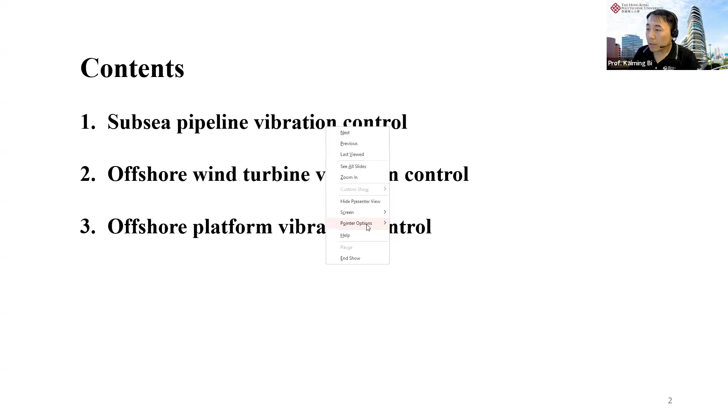Then I will go ahead. Today I would like to introduce something on offshore structure vibration control. That's basically what I did in the last couple of years, mainly in Australia. As introduced by the Chairman, I joined Hong Kong PolyU about 2.5 years ago, in early January of 2023. My presentation includes 3 parts.

The first part is on subsea pipeline vibration control, the second part is about wind turbine vibration control, and the last one is on offshore platform vibration control. I will go through them quickly one by one.

First, let's have a look at subsea pipeline vibration control. Here I just introduce some concepts and results because of time constraints, so I will not explain too much. If you are interested, you can refer to my previous papers, which you can download by searching my Google Scholar or my personal website for more detailed information. I will not give too much detail here.

So let's have a look at this pipeline. I propose a concept called pipe-in pipe, using this kind of design to control pipeline vibration. So what is pipe-in pipe? What is the PIP system here?

Based on the name, you can see that it actually includes two pipes here. We have an inner pipe and also an outer pipe. For the inner pipe, of course, it's used to transport the oil and gas. This pipe is not new, okay. It's already being applied. We just revise the current design to achieve our aim.

This setup has already been applied in the offshore industry, especially in the deep sea. The inner pipe, as mentioned, is used to transport the oil and gas, and the outer pipe exists because, being in the deep sea, the pressure from the seawater is very high. So if you have an outer pipe, it can provide protection to the inner pipe.

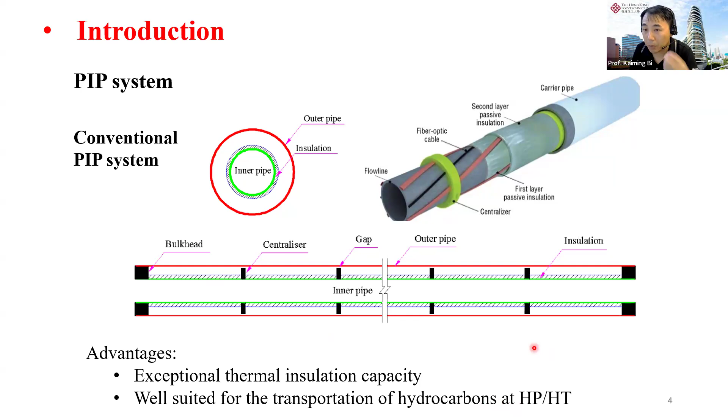These two layers of pipe are connected by this bulkhead and also by this centralizer. But if you look at the current design, this centralizer is not connected to the outer pipe, so the inner pipe and outer pipe are now just connected by the bulkhead. Because of this kind of design, this pipeline has exceptional thermal insulation capacity, so it's well suited for transportation of hydrocarbons at high pressure and high temperature environments.

We did have some previous studies on this part, mainly focused on buckling, because the sea ground may not be flat - you get some kind of curve there. In this case, it may cause a buckling problem, specifically upheaval buckling. Also, if you have some imperfection at the pipe, it will introduce local buckling, and this local buckling can propagate as well - that's buckling propagation.

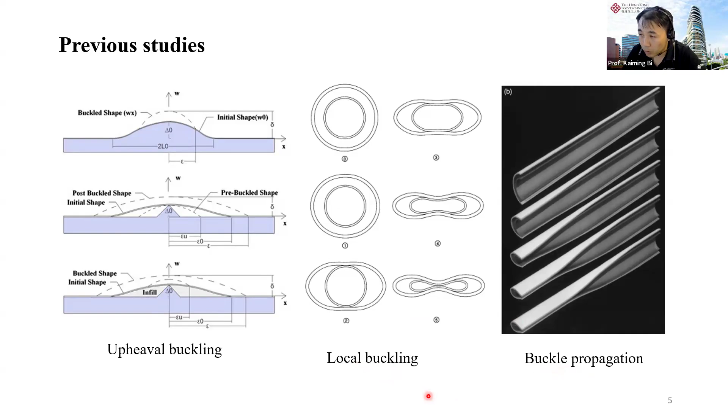That's from some previous study, and also because this pipe is located in the offshore environment, in the subsea, this pipe might be suspended - not fully buried in the soil. Because of this suspension span, it may introduce vibration induced by, for example, earthquakes, and also by vortex induced vibration. Everyone is quite familiar with earthquakes.

For this vortex induced vibration, let me explain a little. Now we have a flow passing through a bluff body - we see this round cross section here. This may introduce transverse fluctuation of this pipe, in the transverse direction, due to the periodic shedding of the vortex. This may always exist and may threaten the fatigue life of this pipeline, so it's important to control this vibration.

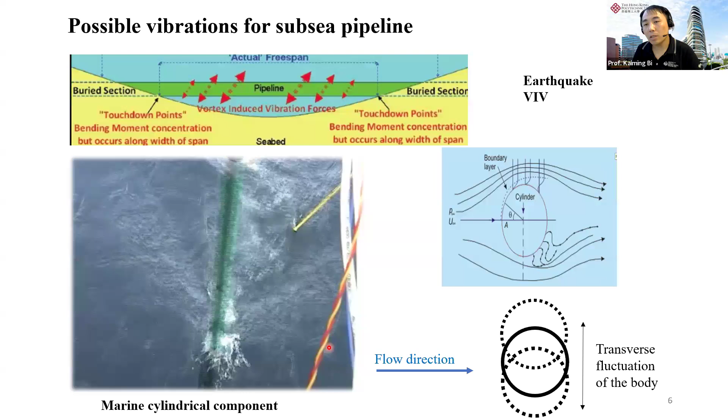Then we introduce this concept I just mentioned. Based on the current pipe-in-pipe system, we revised this a little bit, and we form a so-called system similar to a tuned mass damper system. That's a very widely used system in structural vibration control areas. Let me introduce this a bit.

Now, for example, we have a structure - I simplified it as a single degree of freedom structure here. This red one is connected by a spring and also a dashpot. Now, if I want to control the vibration of this primary structure or main system, we can link a very small mass to this primary structure. The mass ratio between MT and MS is normally, in civil engineering, less than 5%. We link a small mass here, but because our civil engineering structure is very heavy, even 5% is actually pretty heavy - there's a lot of mass there.

So then we can properly select this connecting device - we see there's a spring and also a dashpot there. We can make this green structure, the TMD system, vibrate out of phase with this primary system or main system. For example, if the primary system wants to vibrate to the left, this TMD system may provide a force to the right.

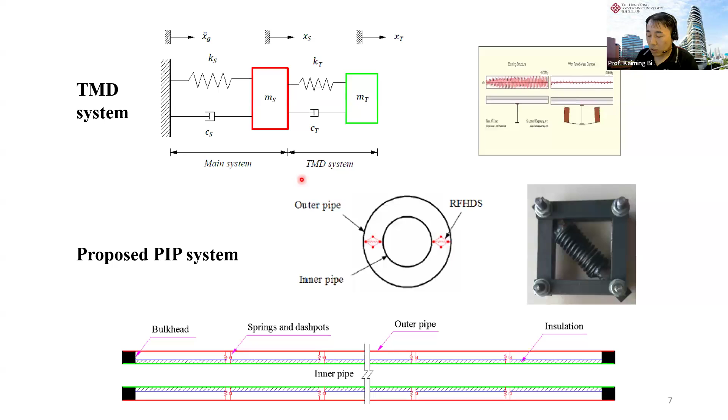Based on this concept, now we can revise this PIP system a little bit. So instead of using the centralizers I mentioned in the traditional design, we can use some connections to connect this inner pipe and also the external pipe, the outer pipe, together. In this case, it can form this TMD system to cancel the vibration of each other.

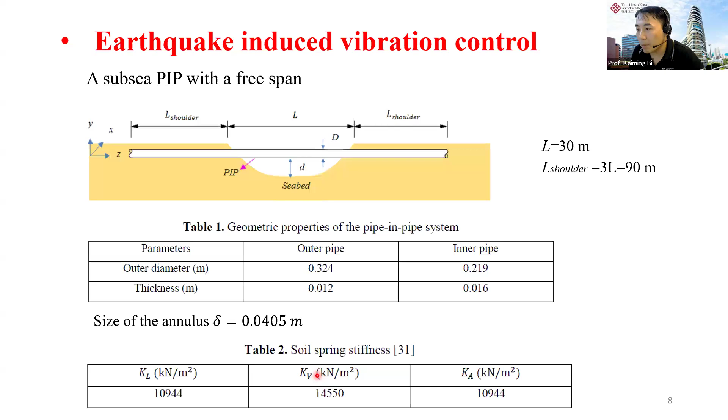Here I just show you some of the results. First, we have a look at this system when it's subjected to earthquake excitation. I will not give the details here. So we got a suspension span here, and I give you the different parameters of this inner pipe and also the outer pipe, and also the soil spring stiffness as well.

I just mentioned we should properly select these parameters, so basically we need optimization here. For this formula, I will also not talk about it, but we can base this on many very mature techniques and formulas to predict these connecting parameters.

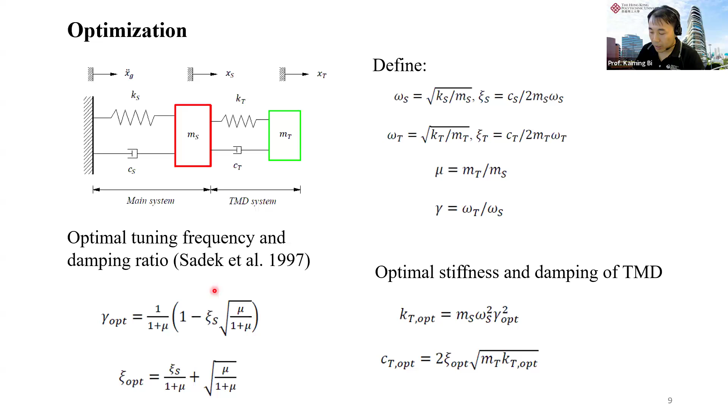So now for this pipe, I just choose three typical earthquake ground motions with different frequency contents, and we have a look at these results here.

For a normal TMD system, we actually didn't pay too much attention to the vibration of that small mass, because normally we need it to vibrate very severely - we need a large vibration there to more effectively dissipate energy. We didn't pay too much attention to that, we allow the vibration of the TMD system.

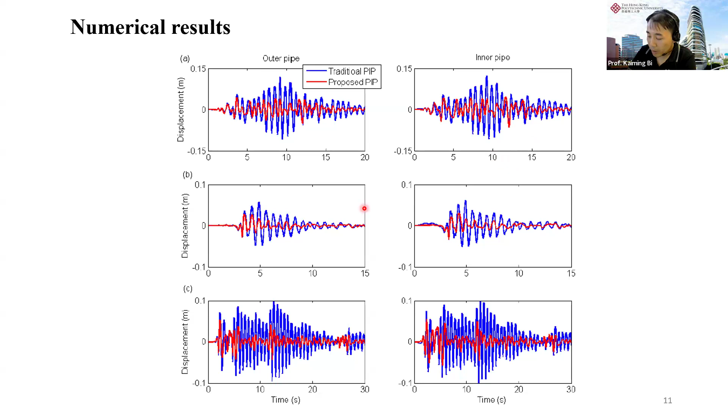It's a ratio, so that means the vibration in this case, because of the large mass ratio, can significantly reduce the inner pipe vibration as well. So that's actually the benefit, and it also improves the robustness of that system. So that's just one example, when it's subjected to earthquake loading.

So now I'll give you something on vortex-induced vibration. I think I need to go a bit faster because I've got quite a lot of slides here - maybe I cannot finish all of them. And it's already 5:30 now.

For this vortex-induced vibration, we don't have this kind of test before. All previous studies used a rigid pipe, so it's only one layer of pipe. So then how do we validate our analytical model?

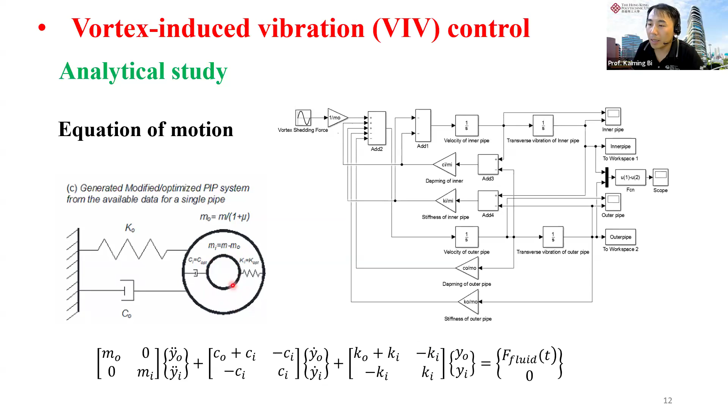Now we use something to connect them together. If I assume this stiffness is very large, then we can consider these two pipes vibrate together, rigidly linked. If we derive the equation of motion of this PIP system and assume the stiffness is large enough, this system can be simplified as our traditional one-layer pipe system, and then we can have a look at our result here.

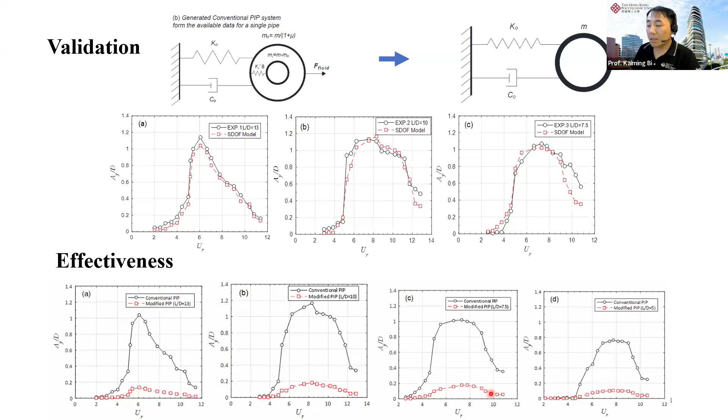We can see when you modify this, the vibration amplitude is much smaller compared to the traditional one. And we further did the CFD simulation there.

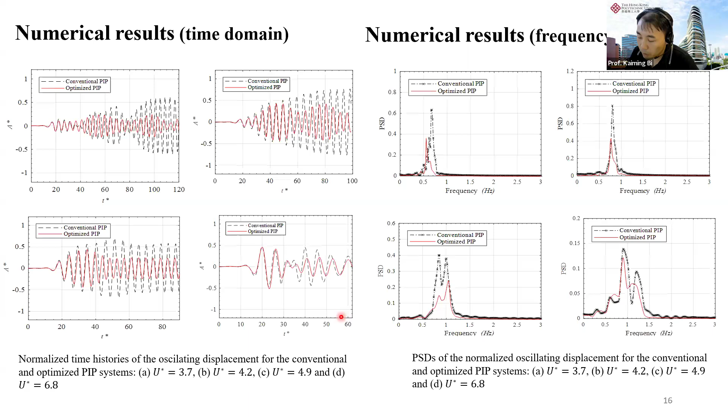So that's for the validation, I won't talk too much on this. That's in the time domain and also in the frequency domain results under different reduced velocities, basically the velocity of the flow. We can see in both the frequency domain and the time domain, the response is reduced, further demonstrating the effectiveness of our concept.

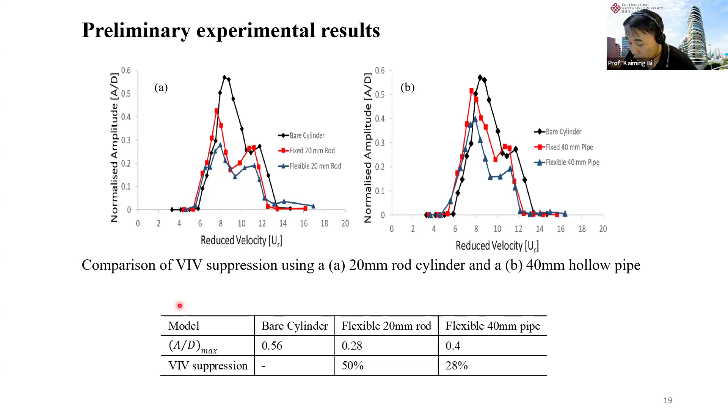And if we use a flexible rod with some optimization there, we get the least response. So that demonstrates the effectiveness again. So that's the one concept, we use the PIP system to control that.

For this vortex-induced vibration, we know that if we change the shape of the pipe, it can also change the formation of the vortex there. It can reduce the vortex-induced vibration. So based on this, instead of a round pipe, we make the outside like a textured pipe.

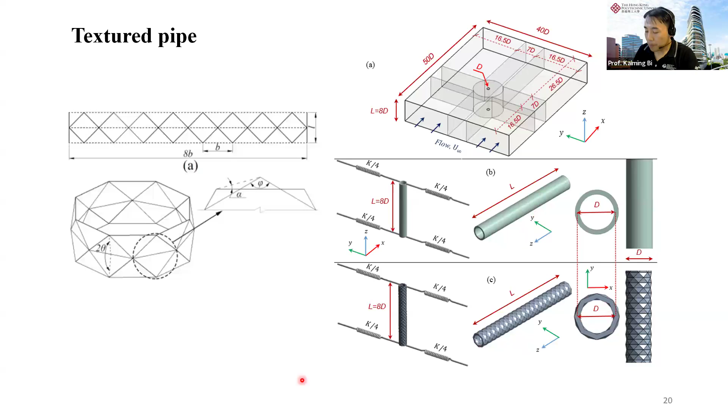Then we did some numerical simulation. If this is our smooth pipe, and our design becomes the texture pipe, we can see that this amplitude becomes smaller. So that means it's effective.

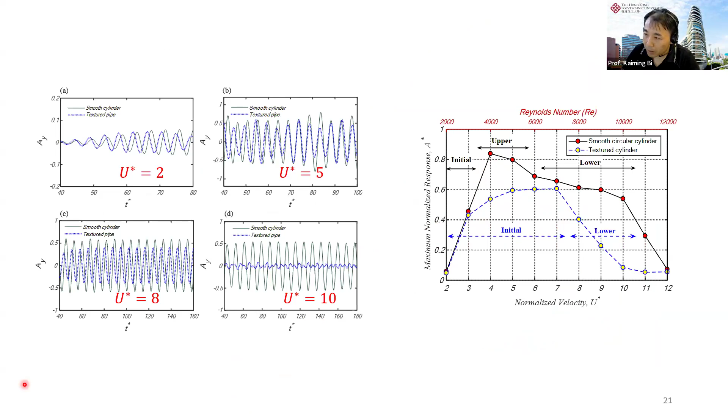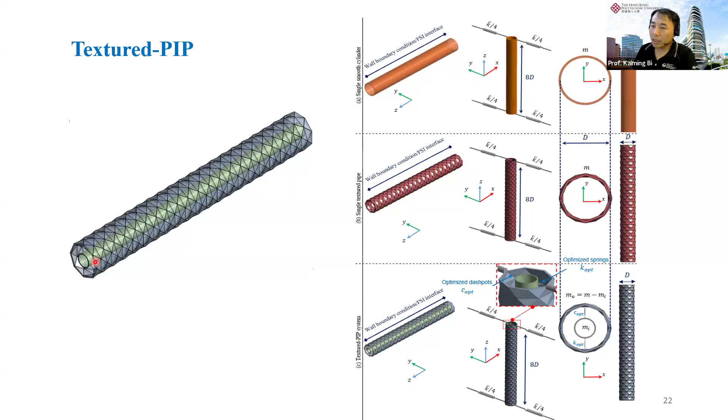We can further combine these two concepts together. Now the external pipe is the texture pipe, and we also have an inner pipe. Then it becomes the textured pipe-in-pipe system.

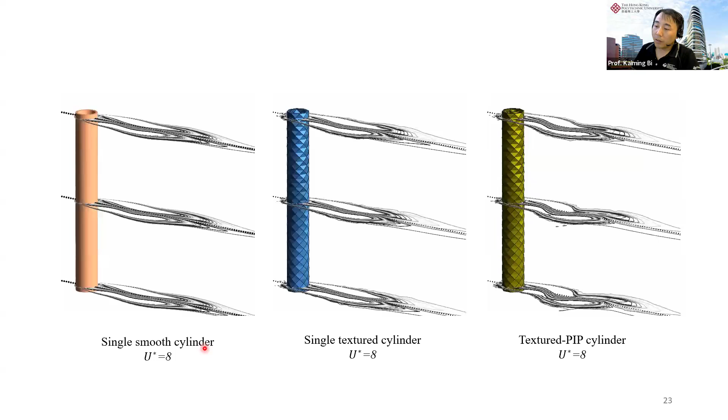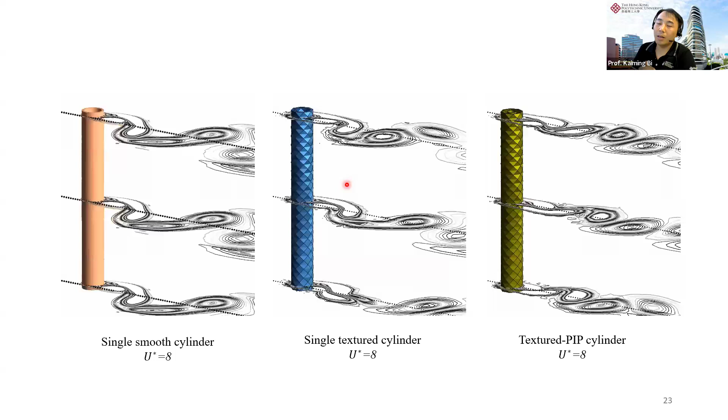If we look at these results, this is a single cylinder, a smooth cylinder. If it becomes a texture cylinder, the vibration becomes smaller. And if we further use this PIP system, the vibration is the smallest. Sorry, maybe you cannot see this very clearly because the simulation size is pretty large, so the slide of my PPT is more than 300 megabytes, so maybe not that smooth.

I'll just show you these results in the time domain, I think that's more clear. You can clearly see at different velocities, maybe this one is even the clearest here.

So if it's a smooth single pipe, you get this kind of result. If we change it to this texture pipe, this result is reduced. If we change it to this textured PIP system, this result is even smaller, because we use two kinds of mechanism there.

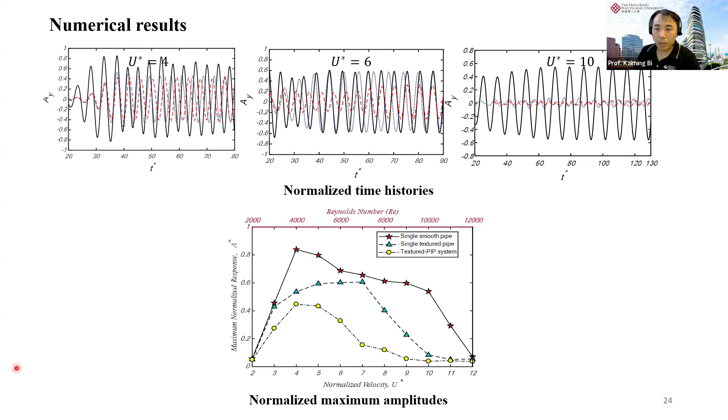One is the tuned mass damper mechanism, as just mentioned, and also the texture pipe, which can change the formation of the vortex there. All right, so that's the first part of my presentation.

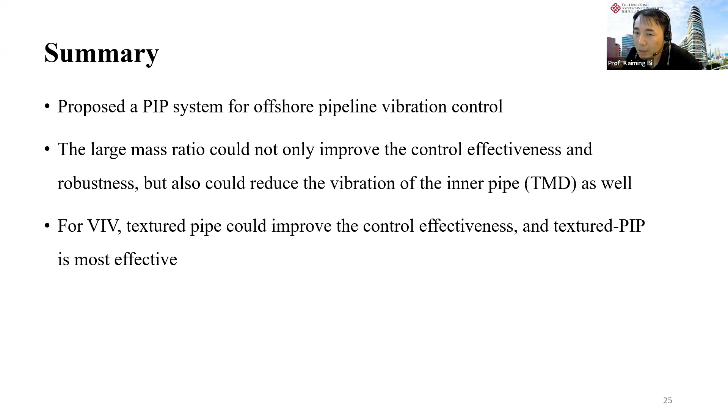So basically, I propose a sort of a new revised traditional design of the pipe-in-pipe system. We connect them together to become a revised pipe system, and then we use that to control the vibration induced by earthquake and also by vortex. Our numerical and experimental studies demonstrated that this concept is effective.

All right, so that's the first part. For the second part, it's on wind turbine vibration control. Because now we talk about green energy, right? So carbon neutralization, offshore wind turbine, that's a key to achieve this goal.

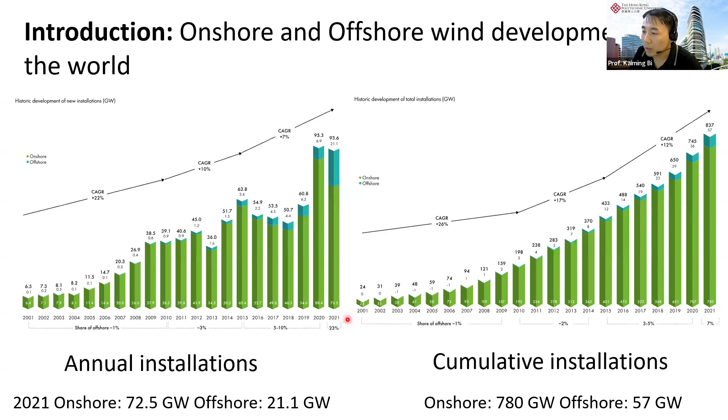If you have a look at this installation here, we can see that it's increased very sharply recently. This information actually is not the latest. I didn't check, I should check this, but I haven't done this. Most of this installation, you can see, is in our mainland.

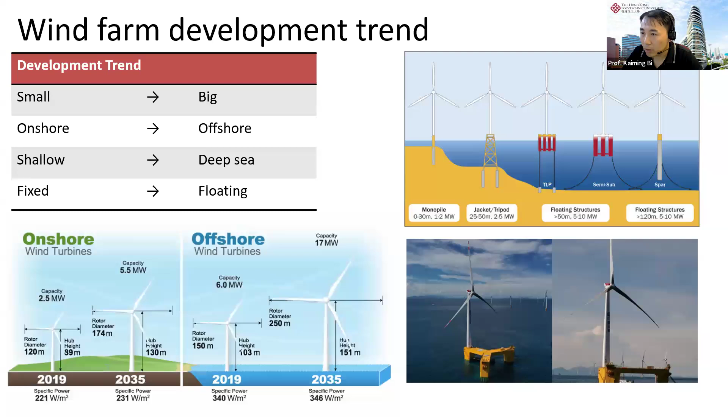I will not give too much details here. For this kind of structure, it's very tall and it's a thin-walled structure, and also we have a very large mass at the top of the wind turbine. From the structural engineer's point of view, this kind of structure is quite vulnerable to vibration, because we only have a single pipe - the tower - to support a very huge mass at the top. So if our tower fails, this structure will collapse.

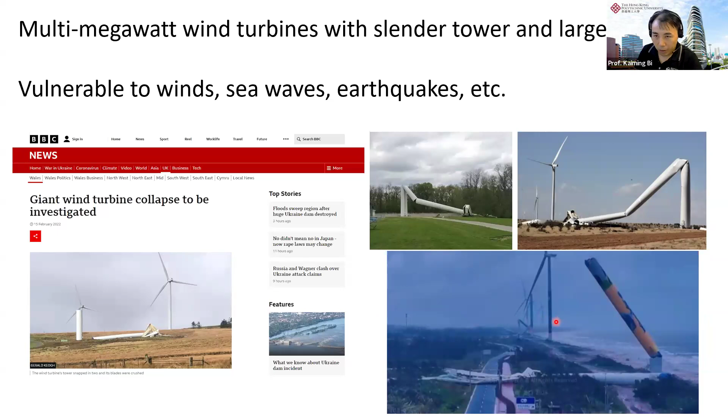Actually, we have a lot of accidents with wind turbine structures. You may remember last September, in Hainan, we got typhoon Mo, which induced the collapse of quite a few wind turbines there. So how to control this vibration of wind turbines is also a big issue. This topic has become pretty hot in wind turbine research, for about 10 years already, I think.

So I did a bit of work on this vibration control. Like previous studies, normally they use simplified models for the analysis. For this kind of model, they just lump the nacelle mass at the top part as the lumped mass at the top of the tower, but ignore the rotation of the blades.

But actually we can see that if this wind turbine is operating, because the blade is periodically rotating, it will introduce centrifugal stiffness to the system. So the frequency vibration characteristics of this structure are not fixed anymore. In this case, assuming the parked condition, which means the blade is not rotating, may not be accurate enough. So I investigated the influence of the operating condition of this wind turbine.

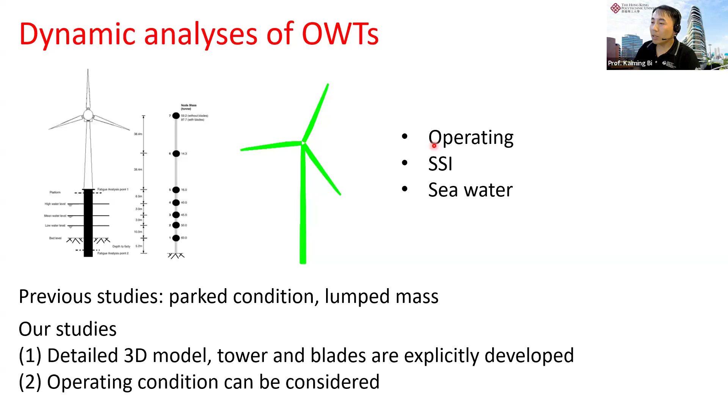We also investigated some other parameters like soil structure interaction and the influence of seawater. Because of time, I will not introduce the last two - I'll just introduce this operating condition. So let's have a look at the result.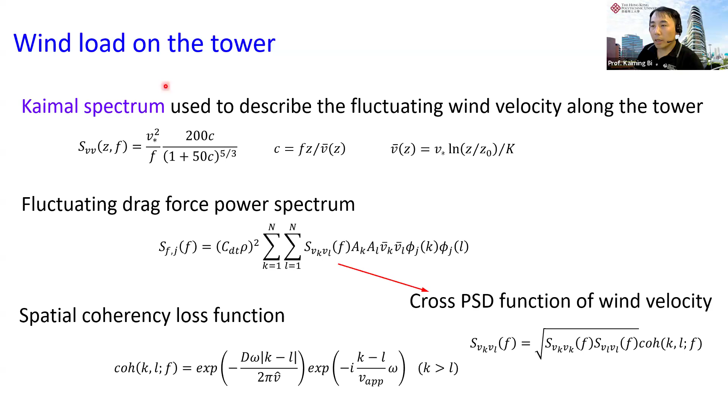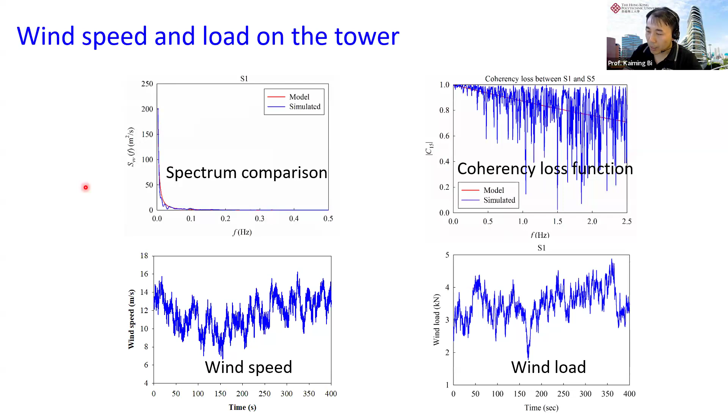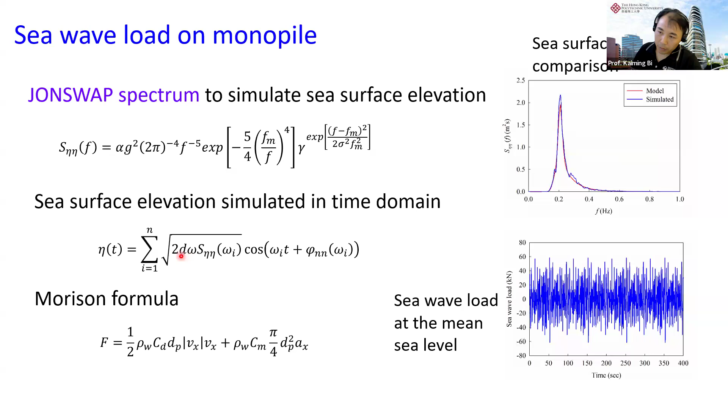Before I introduce the result, let me introduce the loads. On this structure, we consider the wind load on the tower, and that's how we get the wind load. We also consider the wind load on the blades, using the BEM method, and also the wave load on the monopile - what we consider is the monopile type wind turbine. Sometimes we even have earthquake input, when talking about control. If we have this kind of input - the external vibration sources - and a numerical model, then we can get the response.

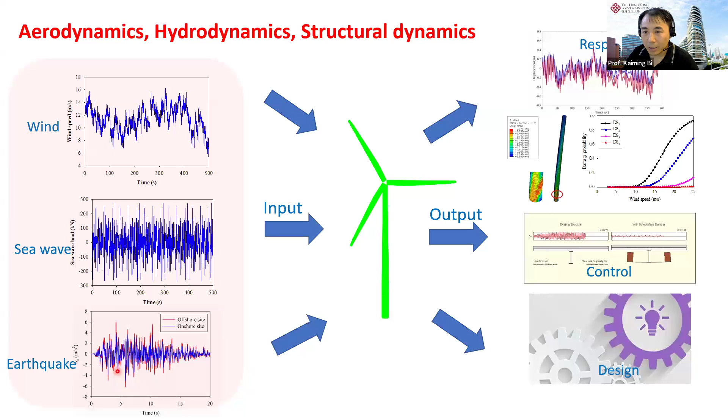We can calculate the response, the fragility, and even we can do the control, and also maybe even for the design as well. So now have a look at these results, all right?

So I just compare these two different conditions: one is the operational and one is the parked condition. This table shows you the results of the vibration frequency of this wind turbine.

Just have a look at this column here. I put a red rectangular here, so 3 boxes. That shows the first tower fore-and-aft frequency, the side-to-side frequency for the tower as well, and another one is the blade frequency. For the other frequencies, you don't need to pay too much attention, because I will use these three to explain some of the results later, so that's why I highlighted them here. But you should pay attention to this.

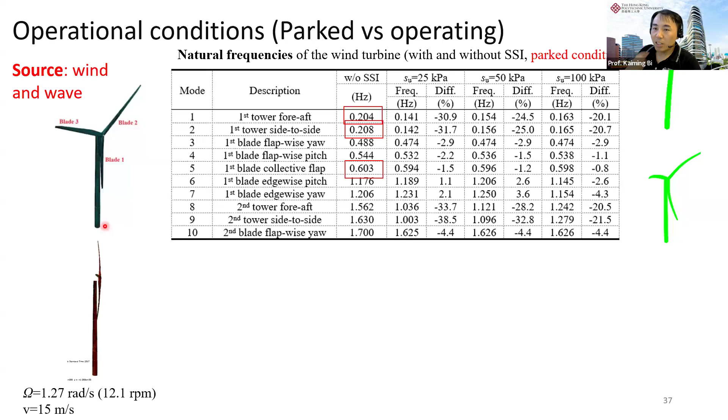These results are obtained based on the parked condition, because in our software we cannot calculate a system with periodic stiffness change there. It's not easy to calculate that. So that's for the frequency for the parked system.

For these wind loads, we can see that for the parked condition, the edgewise and flap-wise directions' wind loads are quite similar. But for the operational conditions, this becomes different. Also for the operational condition, these results are much higher compared to the parked condition. So that means if our wind turbine is in operation, the wind load is higher compared to the parked condition.

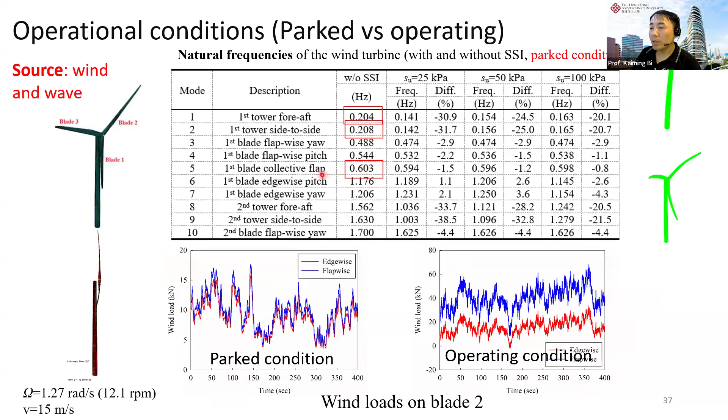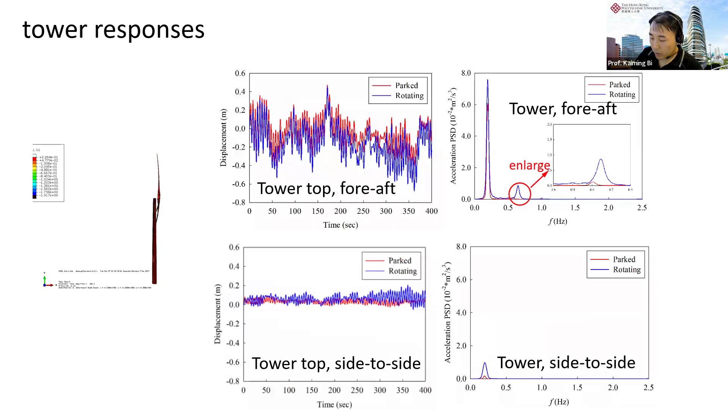So that shows the results of the tower. Actually you can see this second peak is the vibration frequency of the blades. It doesn't correspond to the tower, which means there's coupling between the tower and the blades, so it introduces some response to the tower as well. That's quite obvious because of the coupling there. So that's for the tower response.

So what about the vibration control? The control, all right.

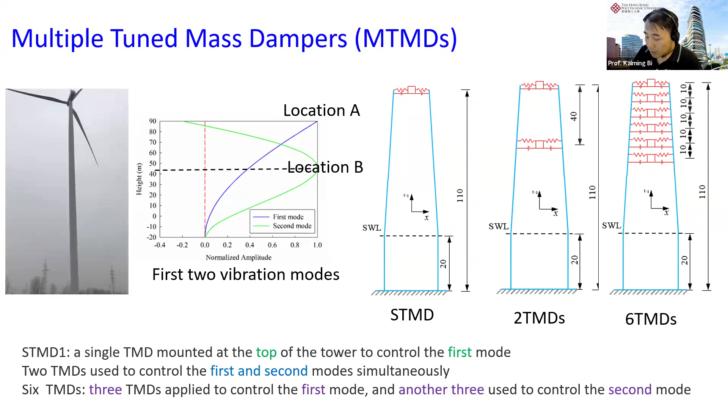Now let's have a look at this control effectiveness. That's how we optimize the connecting device—we won't introduce that here. So now this is the control effectiveness.

We consider wind, wave, and also earthquake loading. The earthquake loading comes in at 30 seconds and lasts for 40 seconds. Because the wind and wave are always there, we calculate the whole duration as 100 seconds, but the earthquake only comes in at 30 seconds and lasts for 40 seconds.

Now let's look at the response here. Of course, if we have earthquake loading coming in, the structure's response becomes higher—that's quite obvious. So the blue curve is larger than this red curve. And if you look at location A, at the top of the tower, you can see the majority of the energy is here.

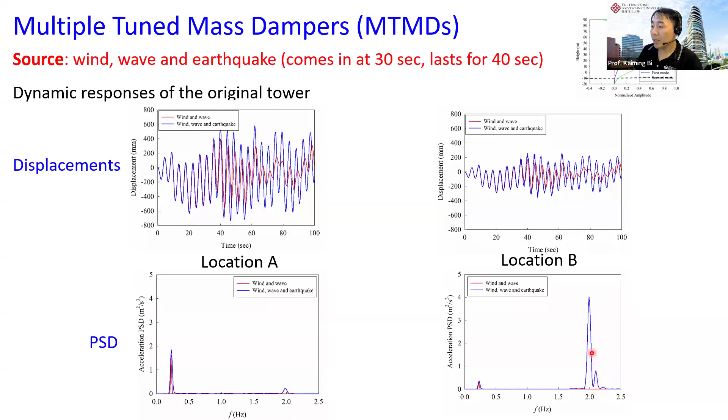The frequency corresponds to the tower frequency. And if you look at location B, when an earthquake comes in, we can see that the higher vibration mode, the second vibration mode, is also excited, and the energy is concentrated at this frequency.

So now I use TMD to control that. What's the control effectiveness? Let me quickly show you the results using this table. I divided this into two cases: one where the earthquake exists, and one without.

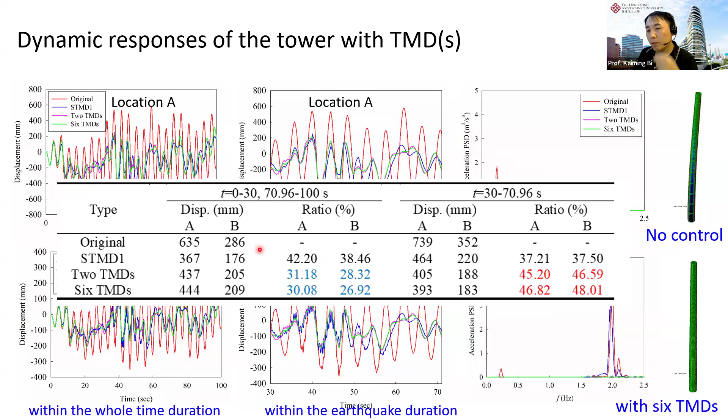For this period, we only have wind and wave, and this shows the control effectiveness. If we have only a single TMD, we can see that gives the best control effectiveness, because when the loading is only wind and wave, only the fundamental vibration mode of the structure is excited. Now if you have 2 TMD and 6 TMD, the purpose is to control the second vibration mode. The mass for the first TMD becomes smaller, and so the control effectiveness becomes smaller as well, which explains why this is not as effective compared to the single TMD case.

But now, if we consider the earthquake loading, we can see that if I divide the TMD into 2 and 6, then the control effectiveness becomes more evident.

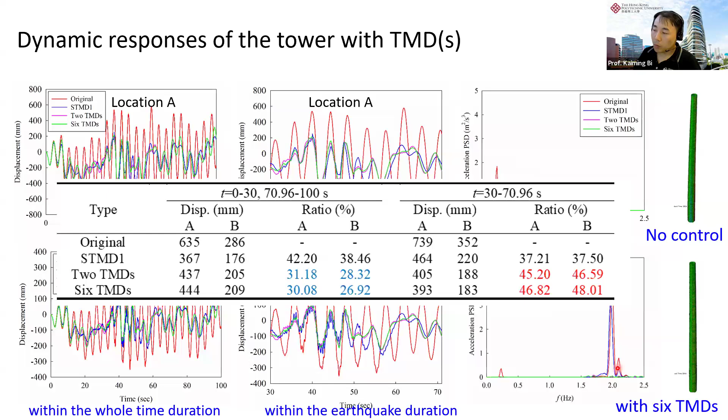All right, so that's because your higher vibration mode is actually excited here. Now if I use more TMD, I can control the higher vibration mode. Of course, the control effectiveness becomes more evident there.

And for the blade, I will not talk too much on this. It's the same like the results. So here is a brief summary.

So basically I talked about two things here. One is the influence of the operational condition on the structure response. We can see that if we consider the operational condition, the response will be much higher normally compared to our parked condition. And also we propose using multiple TMD to control the vibration of the wind turbine structure. So that's the second part.

So I need to quickly finish my third part here. The third part is on this inerter, okay? So maybe I create this. Inerter, as we see, is a two-terminal device. Maybe I think we still need to explain this a little bit.

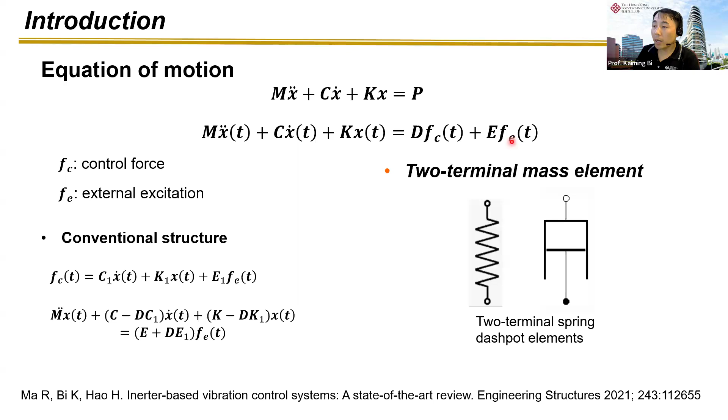So for our traditional vibration control device, if you're familiar with that, normally we change the damping term, and also maybe we change the stiffness term of the equation of motion. But normally we will not change the mass term here.

So about 20 to 25 years ago, Professor Smith in the University of Cambridge in UK proposed a concept of a two-terminal device. He said the force provided by this device is proportional to the acceleration difference between those two terminals.

So if you have a look, if we have this kind of force and we write that into the equation of motion, that means we can actually change the mass term as well. And Professor Smith gave a name to this device, called the inerter. So that means the significance of this device is...

It completed the vibration control theory. So, as I just mentioned, traditionally we only change the stiffness term and also the damping term of the equation of motion. Now we can change the mass term to control the vibration as well, to vibrate the equation of motion as well. So that's the significance, and this topic is very hot in recent 10 years as well.

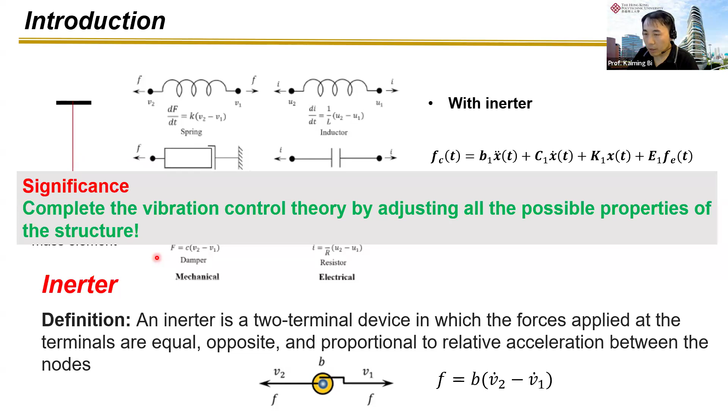We published a review paper about 4 or 5 years ago. I think it's now received more than 300, almost 400 citations. So that means a lot of researchers are actually interested in this kind of work, working on this.

So I need to emphasize the properties of this device. The first one is the mass amplification effect. So as I just mentioned, for our traditional vibration control, we can add a TMD to the structure, right? And the TMD mass normally cannot be more than 5% of the structure.

So as shown here, this is the Taipei 101 tower. Because the mass of the building is huge, in this design they use a ball to control the vibration, and you can see that the mass of this ball is more than 700 tons. It's a very big mass. So because of this big mass, it's very difficult for installation and maintenance. It's not that easy.

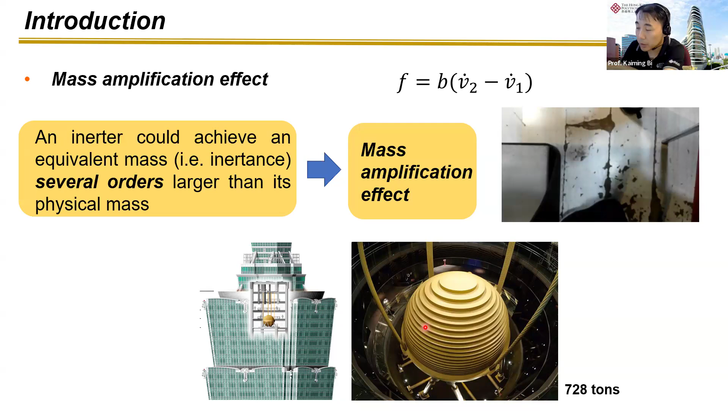So now, if we use this inerter, we can significantly reduce the physical mass of this mass there. That's because it has a mass amplification effect.

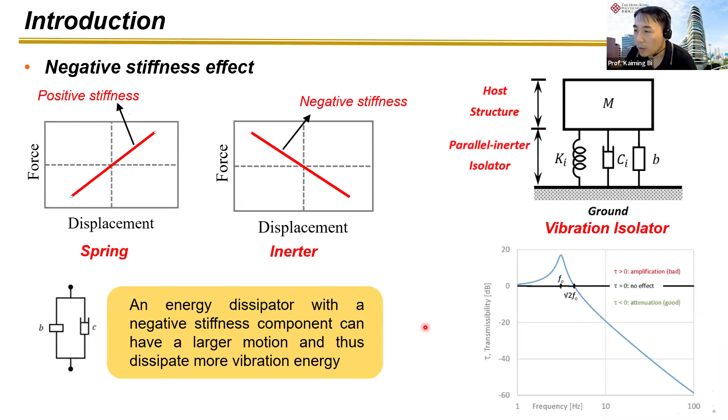And another property is the negative stiffness effect. I will not talk too much on this because I didn't introduce it much in my presentation, but I did work a bit in this area. We have many different methods to realize the inerter. I will not go through them all, but what I focus on is this ball screw type.

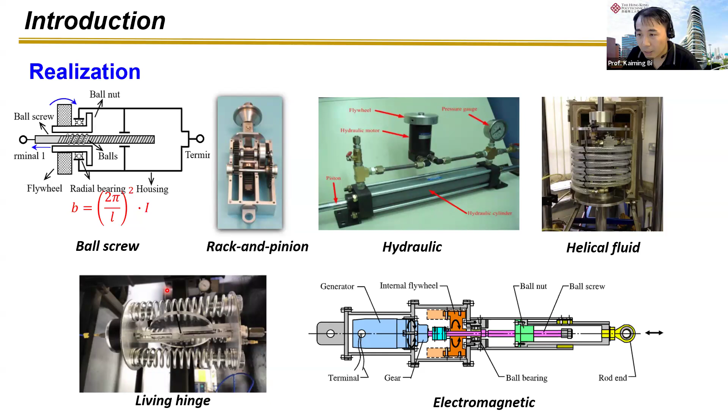Actually, this apparent mass, theoretically, can be many times, 1,000 times, 10,000 times, the physical mass. That's why we can reduce the physical mass.

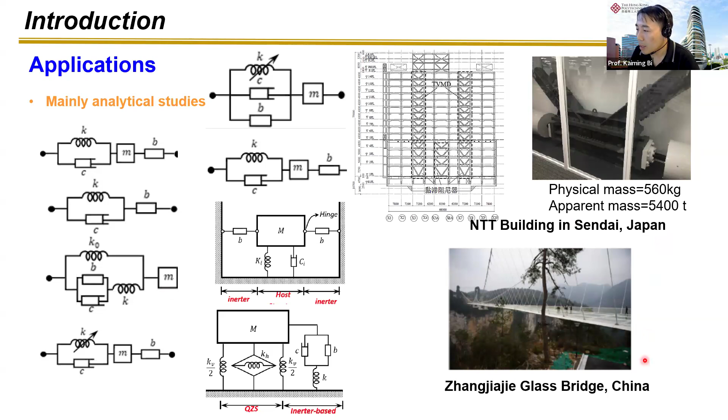For the current applications, previous studies mainly focused on analytical study. But we did have some applications in engineering practice, like in Japan and also in China. Now we use this concept to control the vibration of the offshore semi-submersible platform.

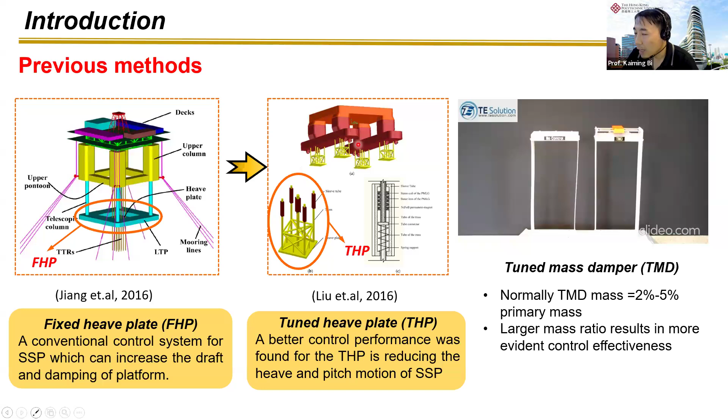I just mentioned the TMD concept. Some researchers propose, instead of rigidly connecting this mass to the top structure, the SSP, they use a tuned mass. They call it a THP, tuned heave plate, meaning they use a spring and a dashpot to connect them together, based on the TMD concept. That's their traditional method.

Now we propose to use our inerter, the rotational inertia damper. We connect that to this system, and analytically derive the equation of motion.

This device actually has two effects. One is because it's rotating there, it provides damping force rotating in the water, so the damping force is large. And also it has a mass amplification effect.

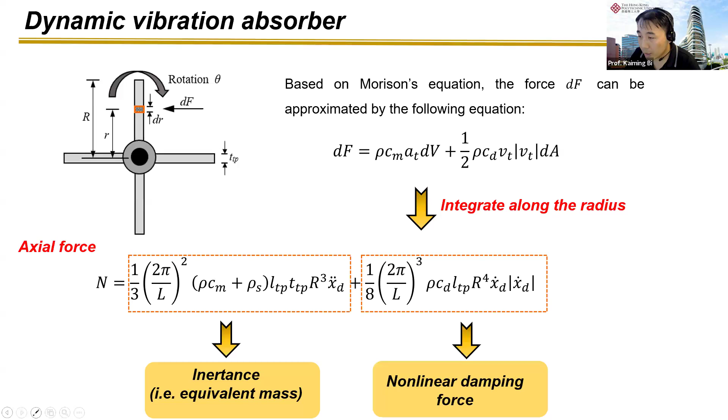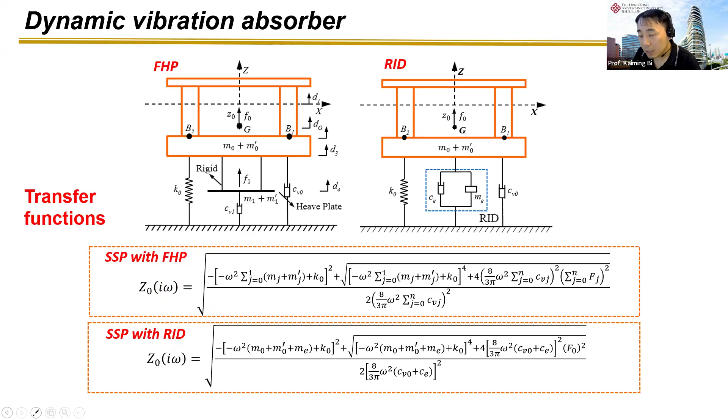After we know the force provided by the device, we can derive the equation of motion of the whole system after applying that device to this SSP, and we can get the transfer functions for the fixed heave plate, for our RID device, and also the corresponding transfer function for the tuned heave plate. Of course this one involves optimization as well, but I will not talk too much on this because of time.

I'll just show you the parameters we use in our study. The SSP has a mass of 26,000 tons. For the heave plate, if we use it, that's about 15% of the SSP mass. If I use the RID here, I use a very small mass - only about less than 0.1% compared to that one. So that's much smaller.

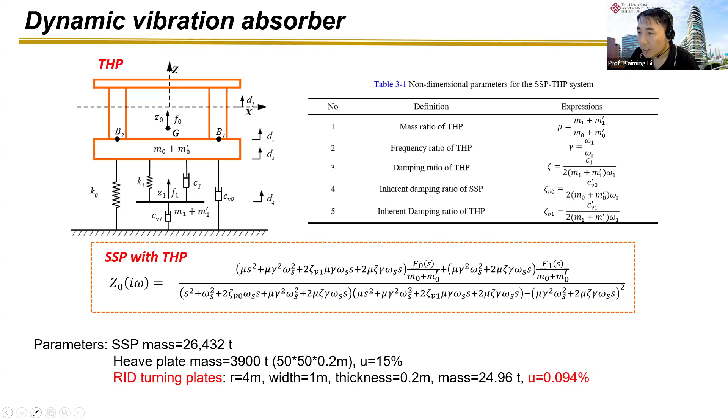Now let's have a look at the analytical results. We consider 6 different loading scenarios.

Sorry, it's almost 6 o'clock. I mean, chairman, is that okay? I'm over time a little bit. Is that okay? Okay, thank you, yeah, okay.

I'll try my best. I think I can finish within... I hope I can do 10 minutes. Okay, so I'll quickly finish this.

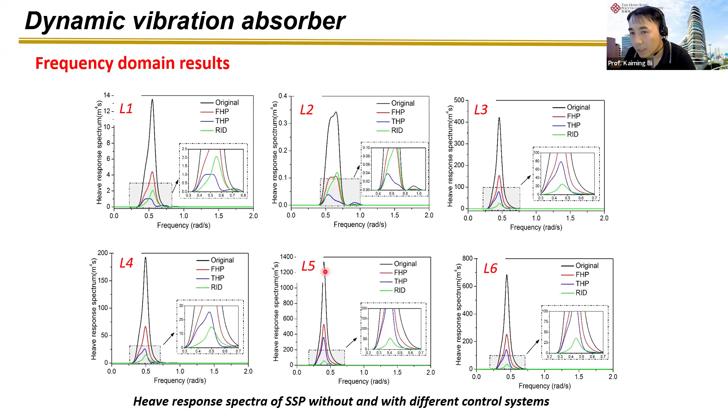This is the results under the 6 different scenarios. We can see that after we applied our RID system, for most of the scenarios it's more effective than the FHP and also the THP device. But I want to emphasize that our mass is much smaller compared to the FHP and THP, because that's 15%, while what we need is only about 0.1% mass of that SSP. The different control effectiveness is because of the different loading conditions - different loading has different frequency content, which leads to different control effectiveness.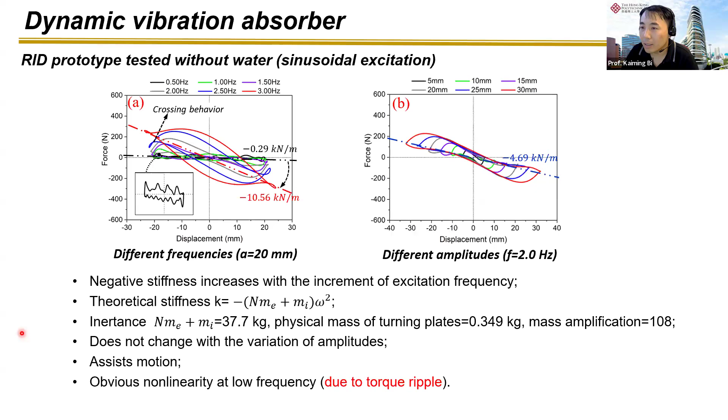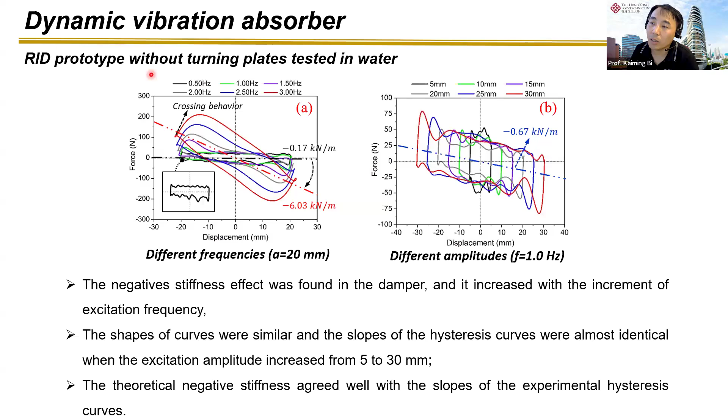So that's the case without water. If we put that in the water, because of the water, as it rotates it will further dissipate energy, and we can see the curve becomes fuller, meaning the area becomes larger. For both these cases, we don't put the turning plate there. Now if we add our turning plate, we can see it becomes even fuller, because it can dissipate a lot more energy through the water.

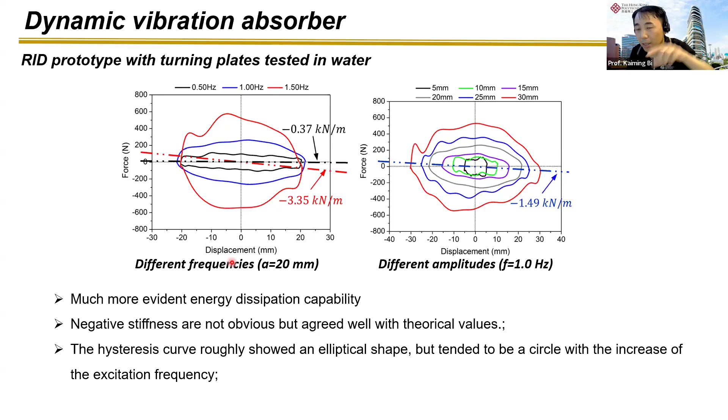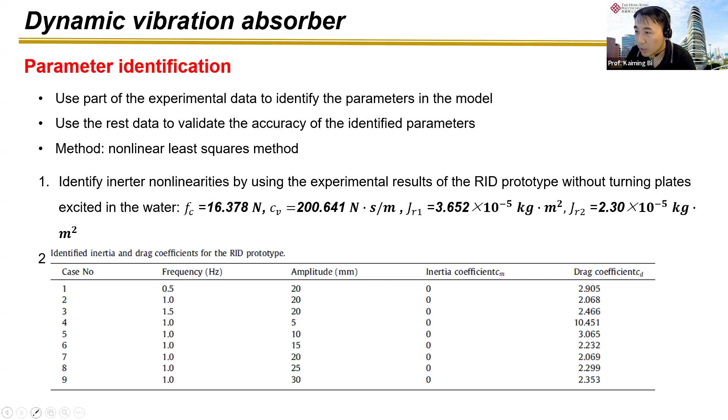We also proposed a mechanical model for this device. Because of time, I will not introduce that in detail, so I'll skip this part. We validated that the proposed model is accurate.

We further did some experimental study on an offshore platform using the device. This is what I did when I was in Australia, at Curtin University. So we designed this test.

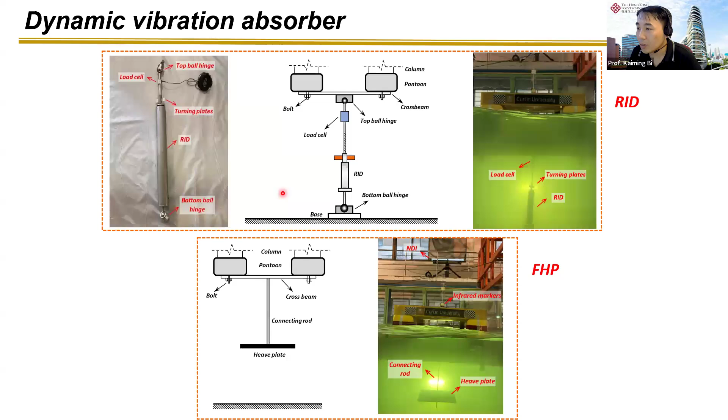We also manufactured this device, and carried out the water flume test. We considered different loading scenarios: 14 regular waves and 2 irregular waves. Now let's look at the effectiveness.

This is for the FHP, our fixed heave plate, which is the traditional method. And if you use RID here, you can see this small thing rotating, which means it's actually working.

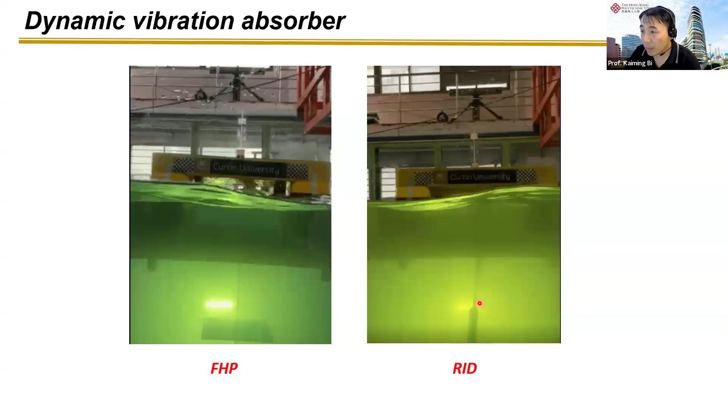Now we can see some of the control effectiveness results here. The black curve is no control. If we add our FHP, it's reduced a little bit, but not that much. But if we add our RID, the reduction is more evident, even though its mass is quite small compared to the FHP.

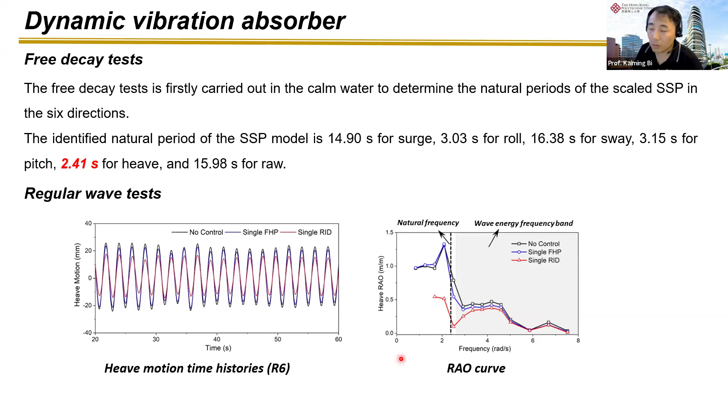We can see this more evidently using the RAO curve. At the resonant frequency, where we get almost the highest response, we see the most evident control effectiveness. That's in the frequency domain.

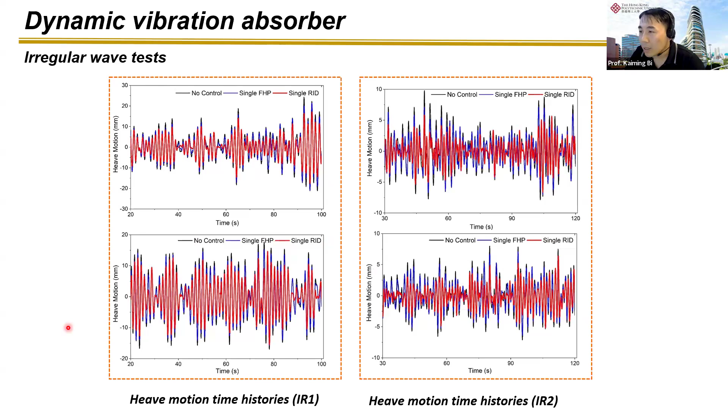In the time domain, we get similar results. We can see the RID, the red curve, gives the smallest results, and in the frequency domain again you get the same trend. So that's the third part.

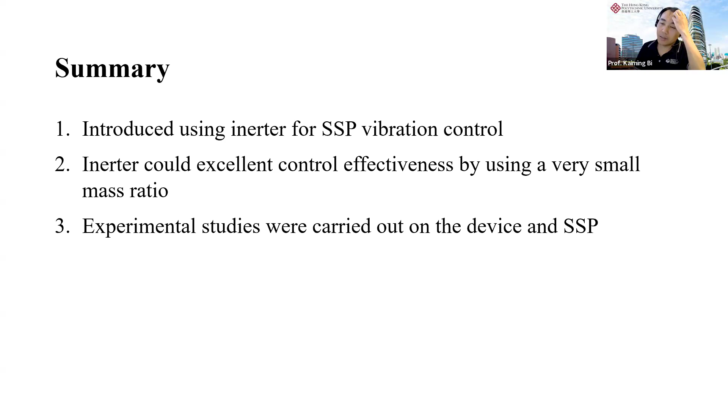I'll briefly finish this. We introduced an inerter device for semi-submersible platform vibration control, and demonstrated its effectiveness through analytical and experimental study. We found it's effective, but of course all of this is at lab scale. We haven't had any real application yet. So that's the final summary.

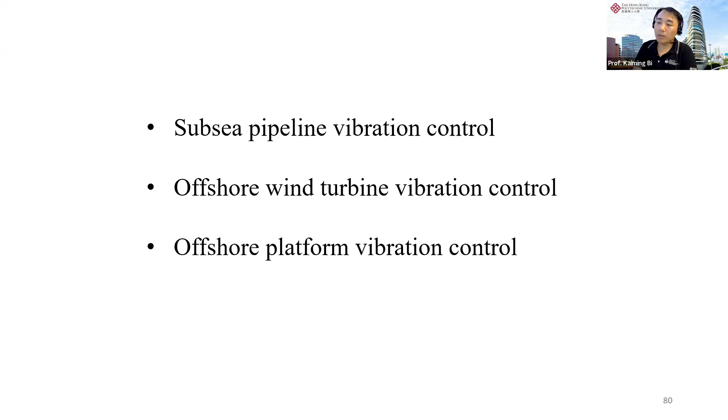In my talk, I briefly introduced what we did in the last 6-7 years: on vibration control of a subsea pipeline, we proposed the pipe-in-pipe concept; on vibration control of offshore wind turbines; and finally on vibration control of SSP. That's pretty much what I want to talk about today.

Thank you very much, sorry for the time. Yeah, sorry about that. Thank you.